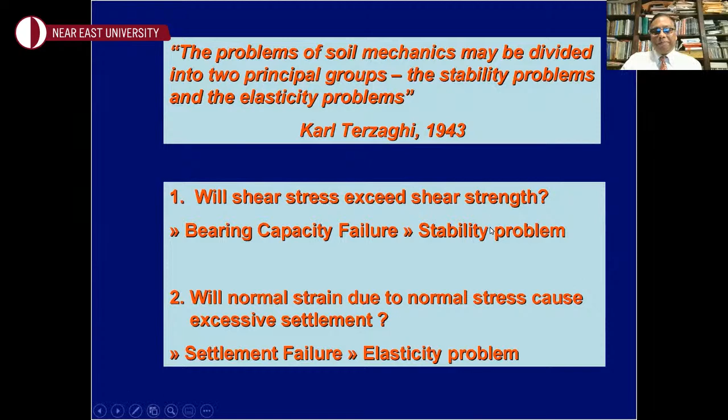Our presentation outline, we divided into 4 parts. Part A is the strip foundation subject to centric loading. Part B is subjected to vertical eccentric loading, and part C is inclined loading, and part D is eccentrically inclined loading.

Let's talk about part A, ultimate bearing capacity of strip foundation for centric loading. Terzaghi proposed this failure surface.

As we know, in this approach we assume that the foundation is located at a depth of dF, and the soil above the level of dF is approximated by the surcharge.

Which is given by Q equals gamma times dF, gamma being the unit weight of the soil. Terzaghi's theory deals with the C-phi soil, so cohesion is C and the friction angle for the soil is phi. There are three zones: the elastic zone ABC, the radial shear zone, and the passive zone BFG. Terzaghi assumed that the angle alpha is approximately equal to the friction angle phi.

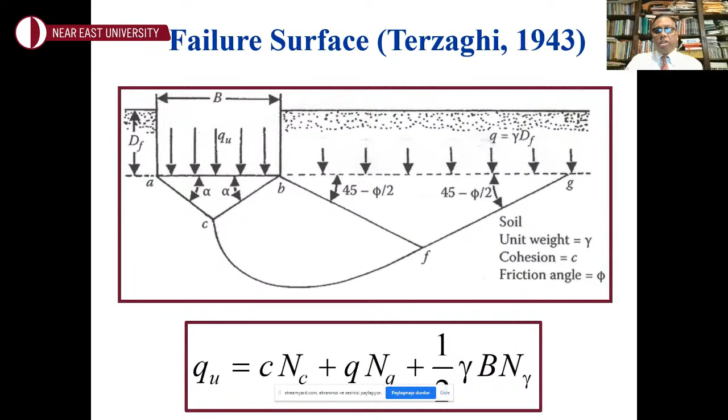P0 is the normal stress on the equivalent free surface, and M is the degree of mobilization, and C plus P0 tangent phi multiplied by M. M varies from 0 to 1.

The angle BAC and ABC in the triangular elastic zone is 45 plus phi over 2, in contrast to phi as assumed by Terzaghi.

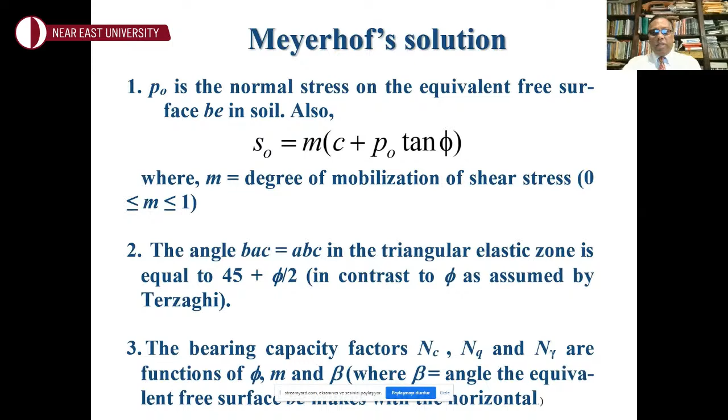Under those conditions, the soil above the level of the foundation is again approximated by gamma times dF, which is equal to the normal stress P0. For granular soils, the C term cancels out.

So this is the ultimate bearing capacity, and the bearing capacity factors NQ and N-gamma are functions of phi.

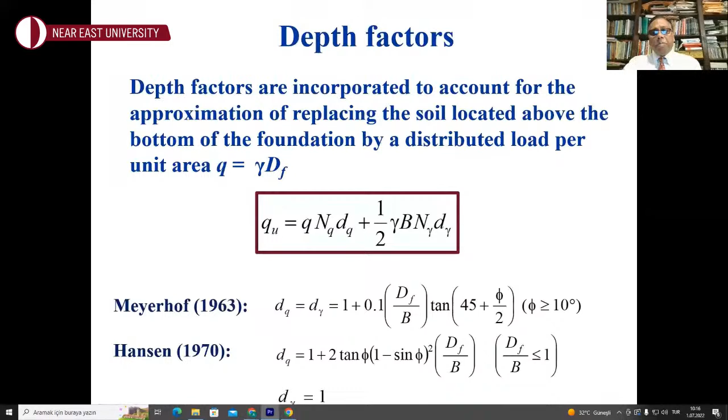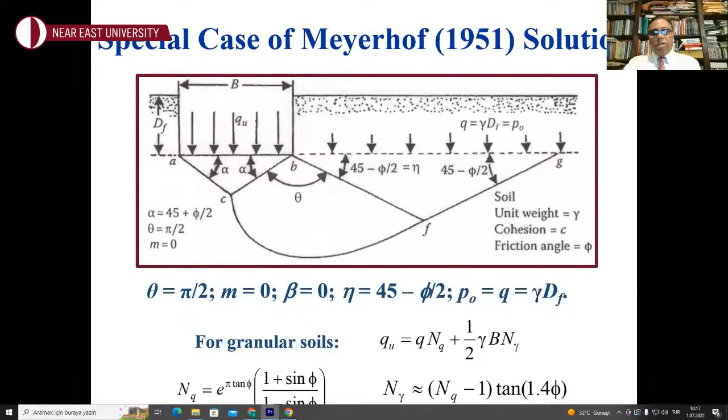So that's pretty much about part A, where the strip foundation is under centric loading in granular soils. Those are the two most well-known theories and theoretical developments, and we saw some modifications over the years since the 1960s, basically proposing new relationships for the N-gamma factor.

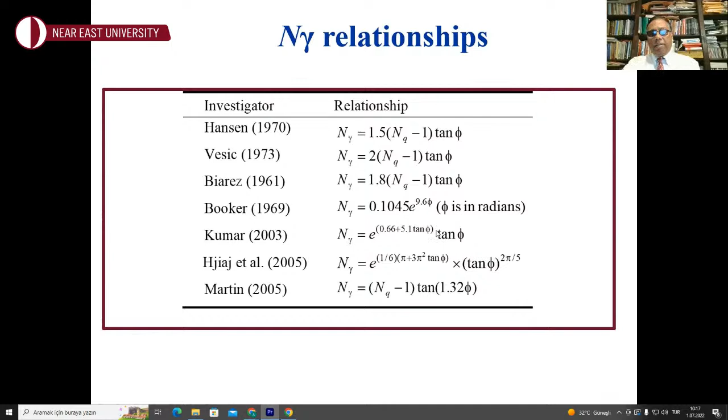That's pretty much it for part A. Let's move on to part B: foundation on granular soil subject to vertical but eccentric loading.

An extremely well-known solution was given by Meyerhof in 1953, called the Meyerhof's effective area method. As you can see on the right-hand side, this is the total width B, and there's an effective width B prime, which is given by B minus 2 times E, where E is the eccentricity of the vertical loading in plan view. So B minus 2E is the effective width B prime.

So QU prime is the ultimate load per unit area. Notice that Meyerhof's equation, incorporating the depth factors, is now using B prime instead of B. And the load on that effective area is given by capital QU. Notice that the B term in the depth factor should be replaced by B prime. So this is how Meyerhof's effective area method estimates the load bearing capacity of the foundation when it is subjected to a vertical eccentric loading.

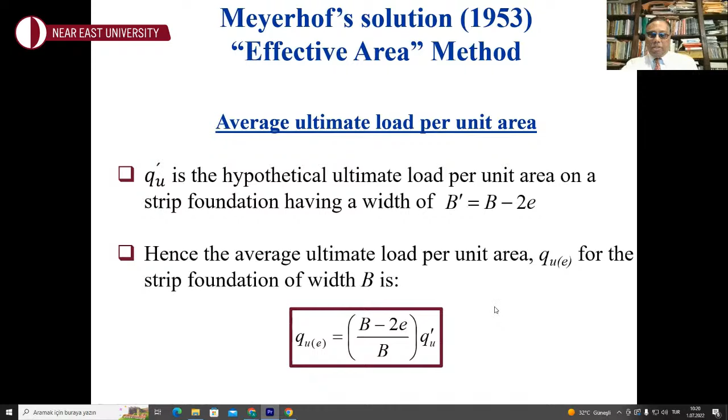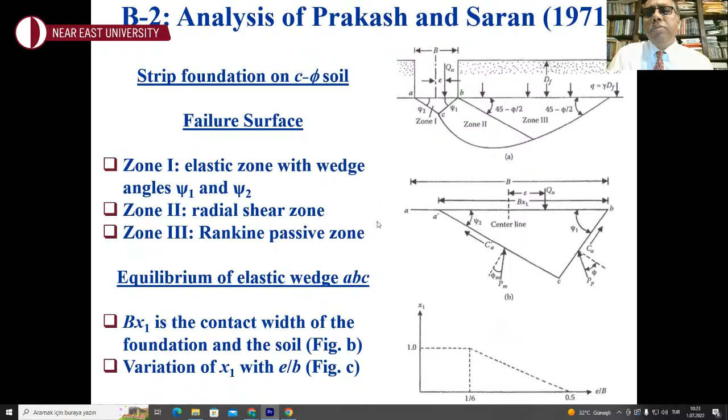So per unit length of that strip footing, it's given by this equation where PP and PM - here is PP and here is PM on that passive zone - both relate to the passive forces per unit length of the wedge, along the wedge faces BC and AC respectively. Phi is the soil friction angle, phi sub m is the mobilized soil friction angle, which is less than or equal to phi. CA and C prime A are the adhesion forces on faces BC and CA, given by these ratios, with angles psi 1 and psi 2. The mobilization factor is less than or equal to 1, and C is the unit cohesion.

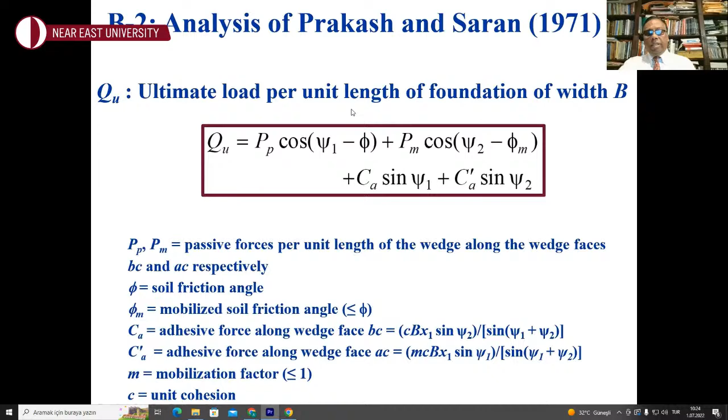So this is what Prakash and Saran in 1971 postulated on the ultimate load per unit length of the foundation of width B, again dealing with load eccentricity. Therefore, the average ultimate load per unit area - our classic definition of bearing capacity - will be equal to this, which can be expressed in a form similar to Terzaghi's original theory. We don't have the C term here because we're dealing with granular soils. Notice that the bearing capacity factors are now called N gamma E, where E is for eccentric loading - these are the bearing capacity factors for eccentrically loaded but vertical loading continuous foundations. So ultimately the equation looks like this.

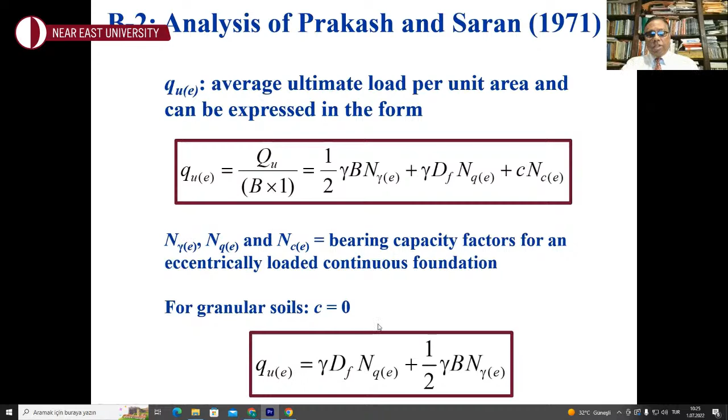And the bearing capacity factors NQE and N gamma E are a function of E over B and the soil friction angle. So that is what was proposed by Prakash and Saran almost 20 years after Meyerhof's effective area theory.

Then there was another theory postulated by Purakyastha and Char in 1977. It's generally called the reduction factor method. Many other investigators have looked into the reduction factor method, and they performed a stability analysis of strip foundation on sand using the famous Janbu method of slices for slope stability analysis. They proposed the reduction factor as follows: the reduction factor is 1 minus QuE over Qu.

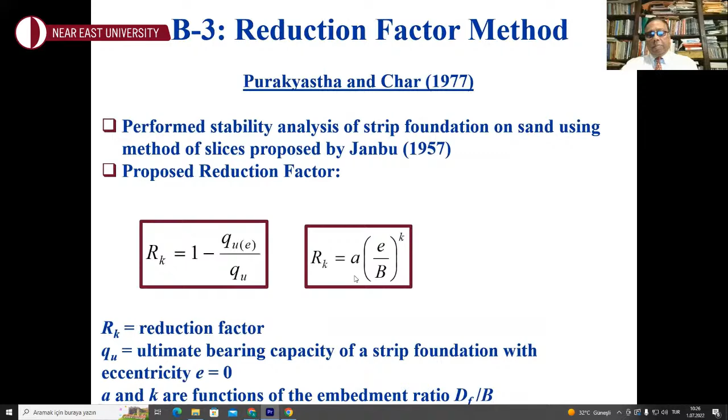Remember, Qu is the ultimate bearing capacity for the control case where there is no eccentricity. They defined RK, the reduction factor, in this fashion, and of course it depends on the eccentricity. The parameters A and K depend on the embedment ratio, and they provided the variation of A and K with respect to DF over B, the embedment ratio.

So from the previous equations, we are aiming to estimate QuE in terms of the reduction factor. It takes this form. And for any eccentricity, if you know the DF over B, then you can estimate the ultimate bearing capacity for the eccentrically loaded foundation.

Since C equals 0 for granular soil, the Qu equation, incorporating gamma, DF, and the depth factors, looks like this.

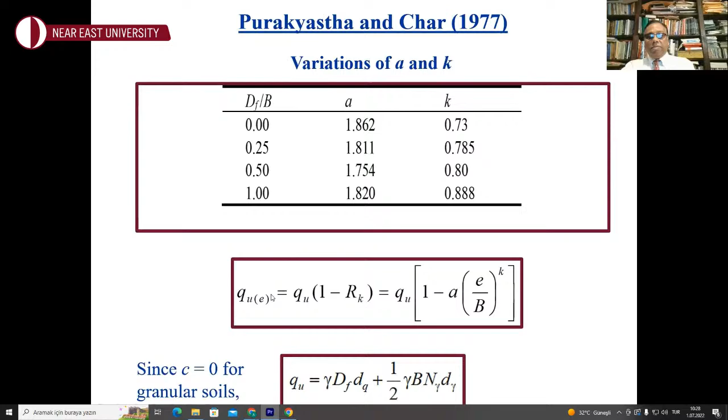There was a comparison made between this reduction factor proposed by Purakyastha and Char in 1977 and their reduction factor, because the reduction factor is a convenient way for estimating the bearing capacity of an eccentrically loaded foundation once RK can be ascertained, right?

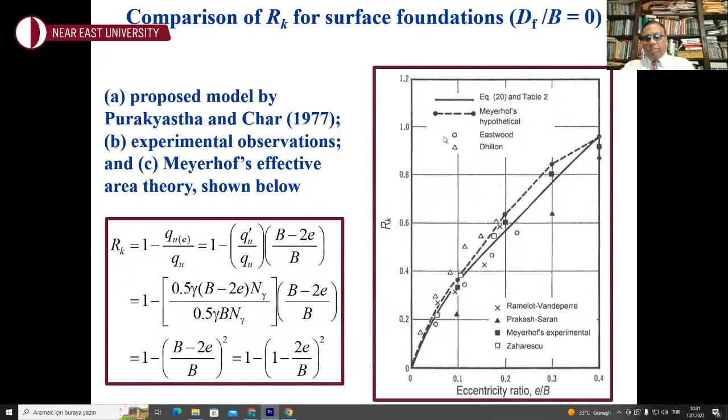Our co-authors, Patra, Behera, and Professor Das, in 2012, published results from quite an extensive series of laboratory investigations for both medium dense and dense sand, with dF over B varying between 0 to 1 and E over B eccentricity ratio varying from 0 to 0.15. So these results, we will discuss later as well.

But based on their experimental observations, they found that the QuE, which is the goal for this part, the ultimate bearing capacity for eccentrically loaded foundation, is equal to Qu times a factor, approximately, which incorporates the eccentricity ratio. So it looks like a nice approximation to estimate the bearing capacity of an eccentrically loaded foundation.

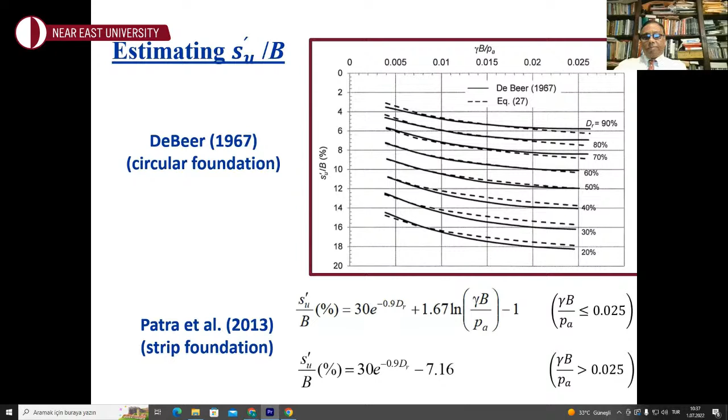So we are in part C. We finished centric loading and eccentrically loaded foundations, but that loading was vertical. For now, we are not looking at eccentricity, but at inclined loading, and looking at the development and extension of Terzaghi's theory and Meyerhof's theory to incorporate inclined loading.

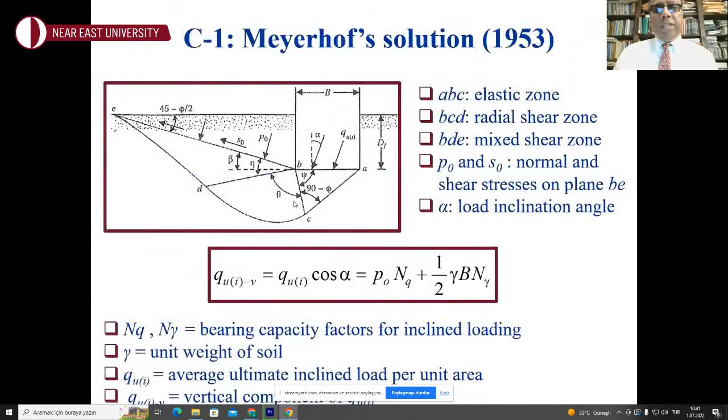The bearing capacity factors will be different because it's inclined loading. Meyerhof represented NQ and N gamma in this way, where PP gamma minimum is the minimum passive force per unit length of the foundation acting on face BC at an angle phi. It's not shown in this diagram, but the plane BC is right here, so the PP gamma minimum acts right here.

And of course, you need to know all these angles. This can be expressed in the usual manner, following Terzaghi's landmark theory along the same format, along the same line. In 1963, Meyerhof expressed his bearing capacity for inclined loading, the vertical component of the ultimate bearing capacity.

Given in this format, NQ and N gamma are the bearing capacity factors, DQ and D gamma are the depth factors, and he defined the inclination factors in this manner. So these are the Meyerhof inclination factors. We come back to the familiar form, with modifications made to the original theory. In this case, along with the depth factor which Meyerhof postulated, he incorporated the inclination factors.

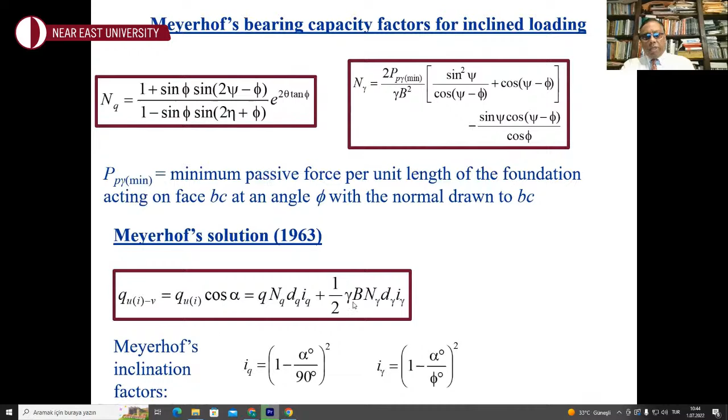So here is one solution, and here is the other classical solution, with the incorporation of the inclination factors.

Some purely theoretical development: Dubrova, worth mentioning, in 1973, with centric inclined load, postulated this equation for the vertical component of the ultimate bearing capacity with inclined centric loading, expressed in this way. Alpha is the load inclination angle, and the bearing capacity factors NQ star and N gamma star vary with the soil friction angle. So this is from purely theoretical considerations.

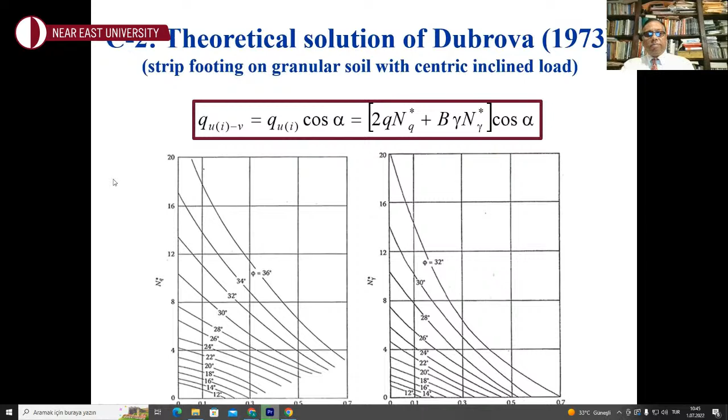And of course there are some empirical observations. This review is not meant to be comprehensive, but it points out the significant, noteworthy developments. There may be others, but these two are noteworthy: one is by Muhs and Weiss, 1973.

Q is the ultimate bearing capacity with centric vertical loading, and QUIV is the vertical component of the inclined centric loading. This ratio is only dependent on the load inclination angle, assuming QU is estimated, and these two must be at similar DF, at similar values of DF over B. So quite a simple formula developed through empirical correlations.

I always tell my students that anything that ever changed the world was actually pretty simple. If you have a very long equation, chances are it will not be adopted by the practicing community. This is purely my personal opinion, okay?

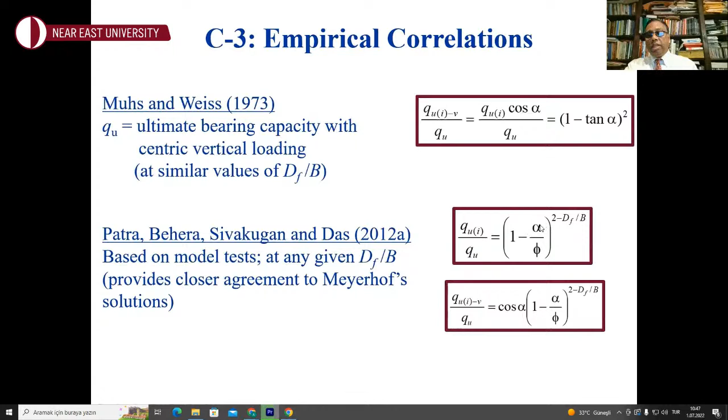Now we are at part D, the strip foundation subjected to eccentrically inclined loading. There are a few more references - in our paper, hopefully some audience members would be interested in this topic and read that paper. It includes a few more references discussed briefly, but the ones in this presentation are those I thought worth mentioning within this limited time. So part D: strip foundation subjected to eccentrically inclined loading - not only inclined, but also eccentric loading.

There are two cases that can happen: one is called the partially compensated case, another is called the reinforced case. In the partially compensated case, the line of application is inclined toward the center line of the foundation, as shown here. As opposed to the reinforced case, where the line of application is inclined away from the center line of the foundation. This is the center line of the foundation, and this is the eccentricity E.

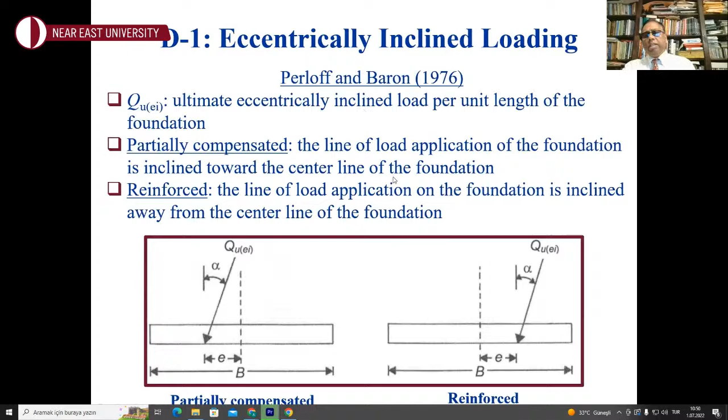Again, for the Meyerhof 1963 effective area method, incorporating both the inclination factor and the depth factor, this is the Meyerhof effective area method to deal with the inclination and the eccentricity.

Q prime U EI dash V. Q prime U is the ultimate bearing capacity effective area method. We can see B prime here, B prime being B minus 2E, and then you have the vertical component of that. Based on the previous development, it is expressed this way. The D gamma, I gamma, IQ, DQ are all based on the original Meyerhof developments that we already discussed and the equations we already discussed. So this is the effective area method by Meyerhof.

So we have looked at Meyerhof's theory for centric loading, and then for eccentric loading, and then inclined loading, and now eccentrically inclined loading.

Saran and Agarwal in 1991 did a pure theoretical analysis, and they postulated this, where NQEI and N gamma EI are the bearing capacity factors. If alpha is equal to 0, then NQEI will just become NQE, because if there is no inclination when alpha equals 0, they coincide with previously discussed Prakash and Saran 1971 theoretical analysis.

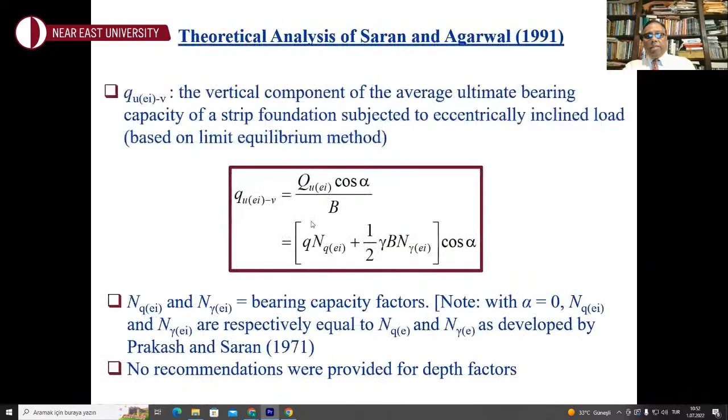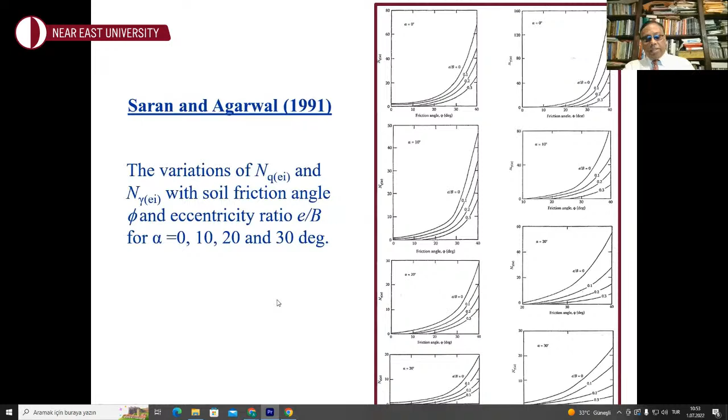They provided guidance to determine NQEI and N gamma EI, with soil friction angle phi and eccentricity ratio E over B, and then the soil friction angle and the load inclination from 0 to 30 degrees. So there is guidance for NQEI and N gamma EI. I apologize that the writings are very small, it's a lot of graphs. I didn't want to truncate this, I could have, just to show you what it is, but just wanted to show you that in a comprehensive way, load inclination factor goes from 0 to 30 degrees. And there's eccentricity ratio and a wide range of friction angles, so a pretty comprehensive development for the eccentrically inclined loading.

How does this compare with the previous development? We don't know, they were not reported in the literature. These are my understanding, these are independent analyses.

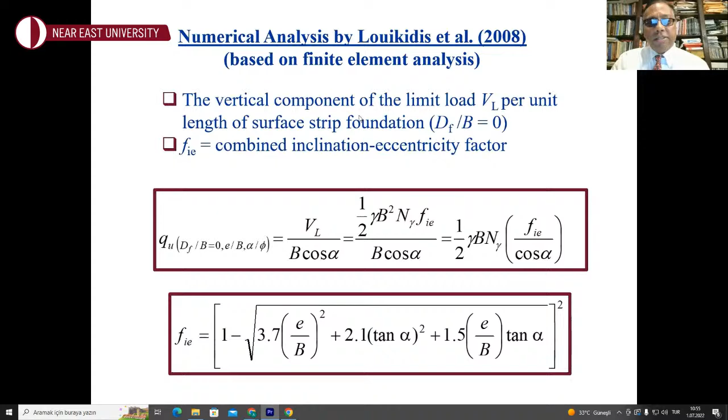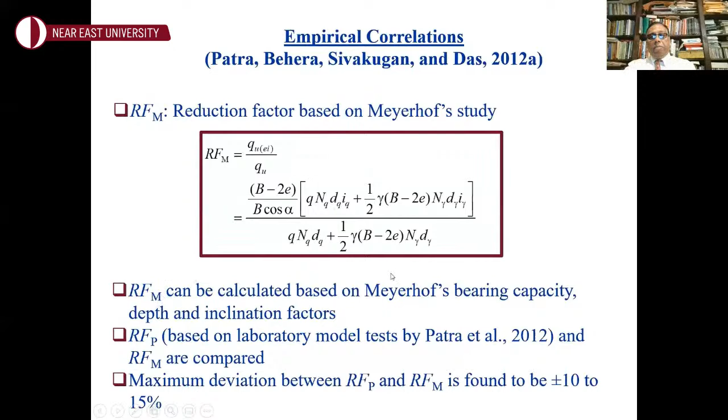Again, this is based on Meyerhof's effective area method. Based on that, you can calculate RFM and then compare with the experimental reduction factor by Patra et al. This is a pretty nice validation of the reduction factor method, which, if you recall, was originally discussed in the Purkayastha and Char 1977 paper.

There's very little information available, as I mentioned, most of the cases in the literature are on the partially compensated case. Here we are talking about the reinforced case, and very little information is available. This is the numerical analysis by Loukidis.

I apologize, my daughter was talking in the background. This is what we learned working from home. This is my home library, as you can see, all these books behind me, and I can assure you I haven't read all of those books. So I just wait for them to leave me alone for a few minutes.

Coming back to the reinforced case: it's a numerical analysis by Loukidis et al. in 2008, based on finite element analysis. We talked about it before, but right now it's for the reinforced case, for eccentrically inclined loading, so that combined inclination eccentricity factor, FIE, is slightly modified here.

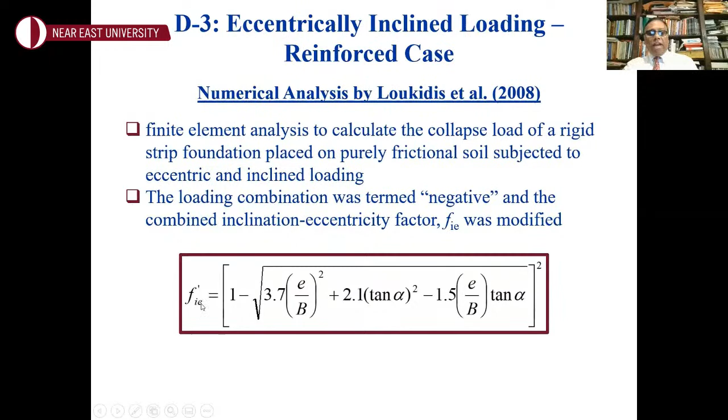They called it a negative case. In the previous equation, this sign was positive; here it's negative. You follow the same approach that was presented before, except for this FIE, now it's called prime.

Empirical correlations, again, we are looking at the reinforced case. Almost no information is available on experimental determination of the reinforced case based on 72, except for Patra et al. 2012a.

They also developed the relationship for settlement ratio. You can see that the reinforced case divided by the partially compensated case, for alpha from 5 degrees to 20 degrees, varies from 1 to 1.4.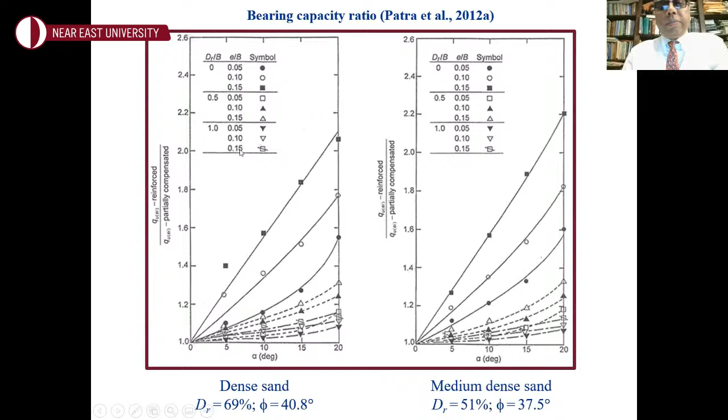dF over B varied from 0 to 1, and these are the eccentricity ratios, with similar diagrams for the settlement ratios. Very interesting experimental observations from the elaborate setup that our co-authors constructed at the National Institute of Technology in India. The academic community is very grateful for their extensive series of laboratory tests, painstakingly done, and we could make use of that data for future predictions and calibration of our models.

It's a similar trend, and this ratio gives a nice guideline for the reinforced case versus the partially compensated case, so you have a nice idea about how the settlement would vary.

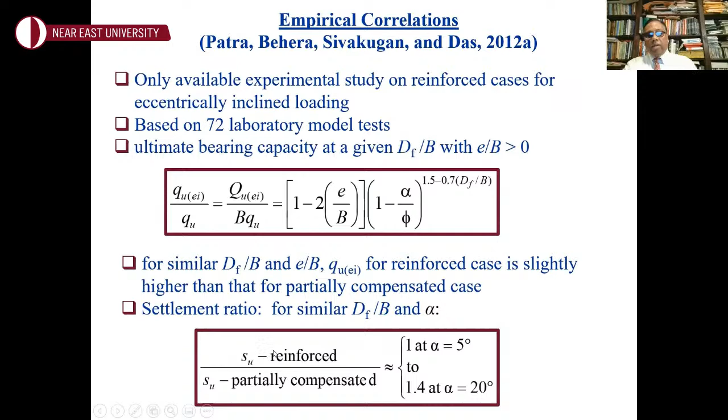Finally, our co-author Behera, very recently in 2018, presented probably the only case where we say it's a combined case. Combined case means it's not eccentricity and inclination, but about the partially compensated case and the reinforced case.

They took all the laboratory test results done by Patra et al. 2012A, almost like 200 laboratory model tests, and developed this reduction factor. On top is QU, and it has DF over B, E over B, alpha over Phi, and LA, which is a new term. LA is called a load arrangement factor, divided by a control case at similar DF over B, with no eccentricity, no load inclination, and the load arrangement factor of 0.

So we know this, at least we want to claim that we know this from various means. And this is the right-hand side. So the new item LA is called the load arrangement factor, and this is how they combine the partially compensated case and the reinforced case. Pretty novel work.

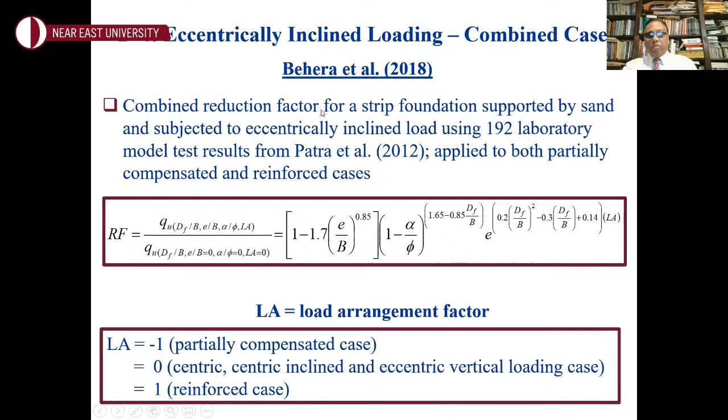LA will be -1 if it's partially compensated, 0 for centric inclined and eccentric vertical loading, and 1 for the reinforced case. So it goes from -1 to +1. Pretty novel and pretty comprehensive approach, recently published in 2018.

So here are some conclusions. I was not keeping track of the time. I'm recording this at my home, so nobody was alerting me about the time, but I'll be brief now. We have done a review of developments in the area of ultimate bearing capacity of shallow strip foundations on granular soil due to vertical eccentric loading, centric inclined loading, and eccentrically inclined loading.

Based on the review, it appears that Meyerhof's bearing capacity theory, incorporating the depth and inclination factors, is probably still the best approach, and any new developments are actually compared with Meyerhof's approach.

For foundations subjected to vertical eccentric load, the method proposed by Patra et al. provided a reasonably good estimate of the ultimate bearing capacity, and it was compared with other methods.

There was a novel procedure presented by Patra for the average settlement of a foundation under an allowable eccentric vertical load. We want to make a statement that the estimated settlement should be considered as a first approximation only, but the approach was, in our opinion, pretty novel.

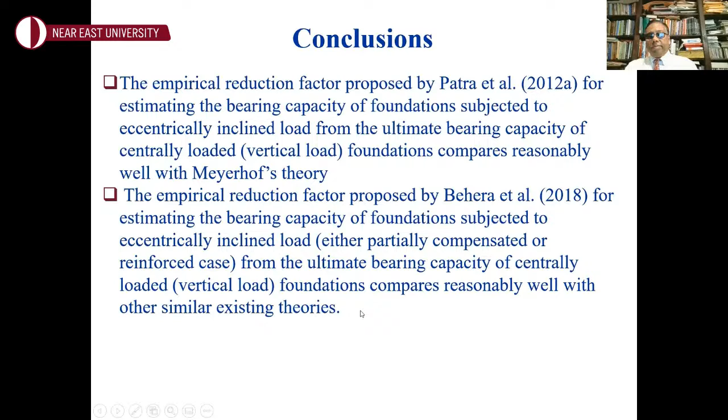So that concludes my presentation. Hope you enjoyed it.

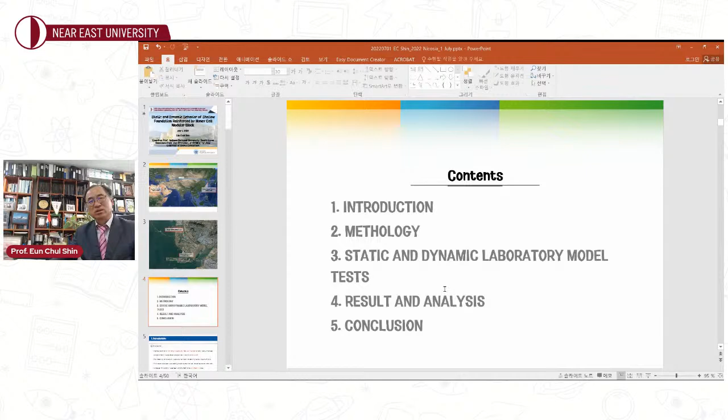So the content of my presentation today: introduction, methodology, and the static and dynamic laboratory model tests. Particularly the dynamic test is more like the shaking table test. And then the results and analysis, followed by the conclusions.

So the reliability of Honeycell capacity has been studied through laboratory tests, static and dynamic shaking table tests, and also plate load tests at the site.

The method has been successfully implemented for real structure construction sites. We had more than 400 project sites in South Korea. Why is this methodology so popular? Because of its cost effectiveness and very simple construction method, which gave it a tremendous expanded market share in Korea.

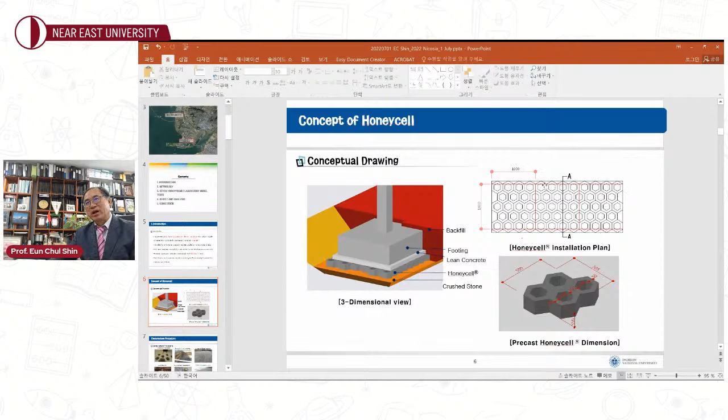At the bottom, we grade the virgin ground, then layer about 30 centimeters thickness of crushed stone. Then we set up the Honeycell modular block, a hollow block, and fill it with crushed stone. Then we put in lean concrete and also the normal shallow foundation system on top. This is an example of a schematic diagram of the layout and plan view.

This is the sequence of the construction work. This is the view of the Honeycells. We can construct it without excavation or scraping the ground surface, or we can have excavation if we want a basement, so a 1-story or 2-story basement.

After grading, we place the crushed stone with a thickness of about 30 centimeters, then compact it with a smooth wheel roller. After that, using crane equipment, we transport the blocks one by one. They're heavy enough that people can't transport them, so equipment is needed.

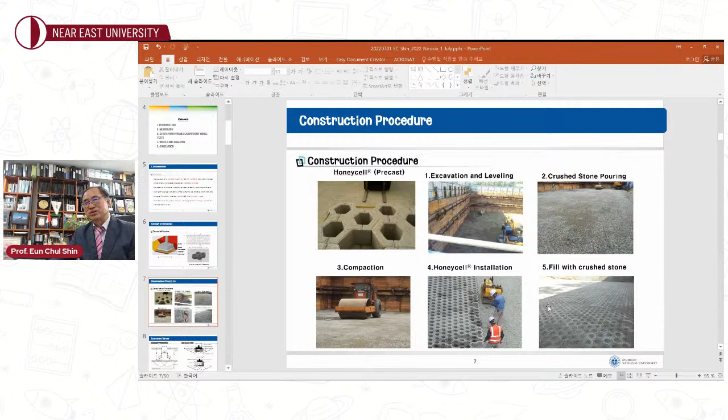After that, we fill the crushed stone inside the block and a little above it, and using a small compactor, we level and lightly compact the ground surface. This is the finished foundation system, like this.

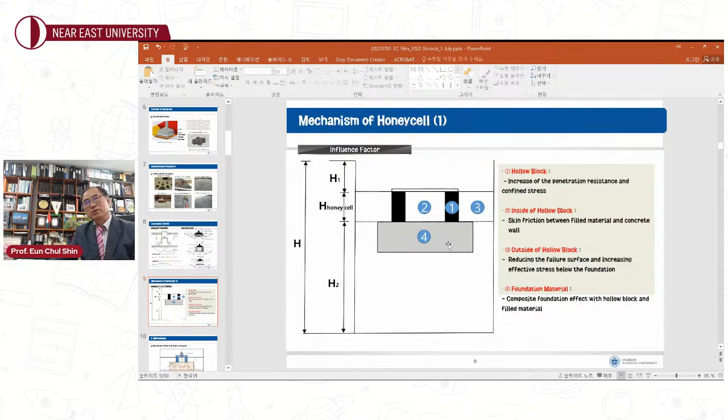This failure model looks very much like the Meyerhof-Hanna model, but here we have the hollow block space and resistance along here - this is a schematic diagram. We also have the bearing capacity problem in the bottom soft layer. So we combined this part, this part, this part, and the basal part - four parts together - to propose the formula for estimating the bearing capacity.

So this is the formula: Q total. Q sub S is the skin friction inside the hollow block, and Q sub K is this part, the bearing capacity of this part here. And the next formula, Q sub KS, is this block.

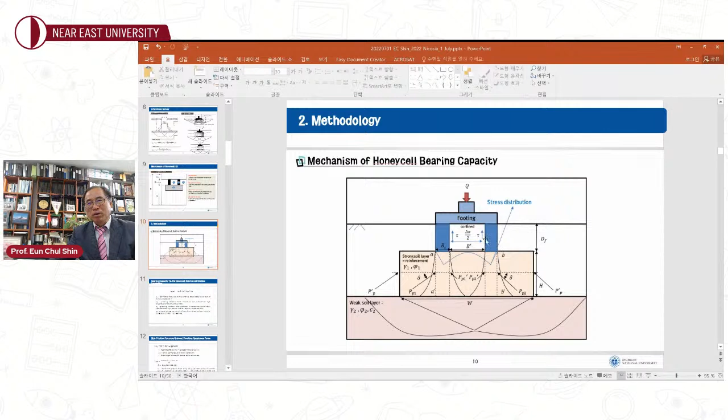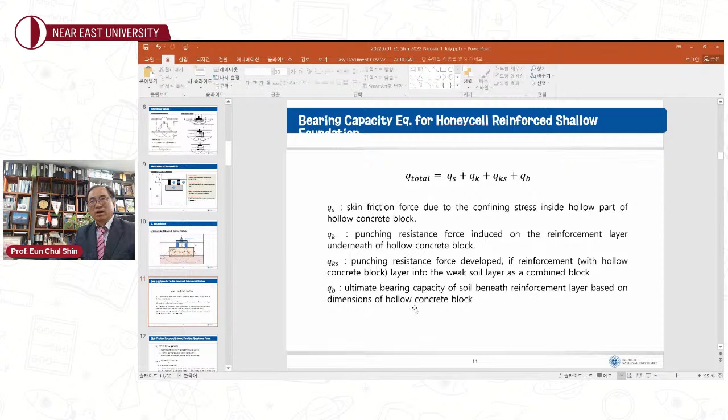This is a block mobilized together against the surcharge load, and the number Q sub B is the ultimate bearing capacity of soil beneath the reinforced layer, based on the dimension of the hollow concrete block.

So we defined each category of this. Of course, we can find this through the direct shear test, and we can find the interface friction angle from the direct shear test, and calculate overburden pressure, and Q sub S, which is right below the hollow block, is a parameter.

We can find Q sub K, like punching resistance, as Meyerhof proposed. Q sub KS is the bottom reinforcement resistance together with the hollow block area acting as one body, like a puncture resistance force in the combined concrete modular block and reinforcement area.

Number 4 is the basal reinforcement, which is the area of reinforcement divided by the area of the concrete block. This is similar to Meyerhof 1963, a general equation for calculating the shallow bearing capacity of a shallow foundation, with consideration of the shape factor, depth factor, and loading inclination factor.

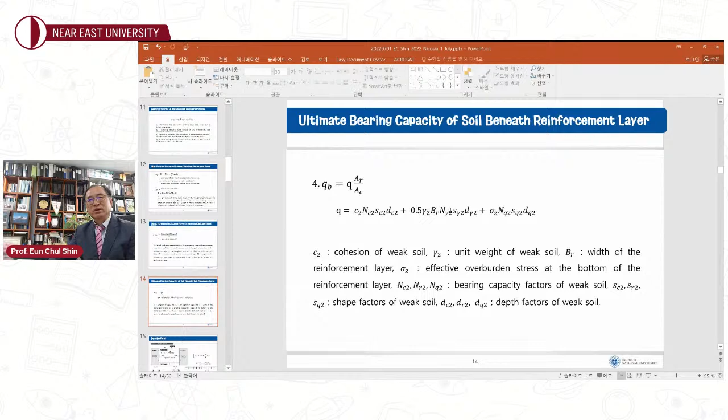So with the combination of four different categories, we can add them together to determine the ultimate bearing capacity using the modular block, hollow block foundation system.

This is inside the increase of shearing strength inside the block. As you see, the C terms and the apparent cohesion - we can calculate sigma h and tangent delta to find the shearing resistance.

Because of this advantage, we have a very large interface area with the gravel, internal friction, and additional confined pressure, so the resistance increases very much against that.

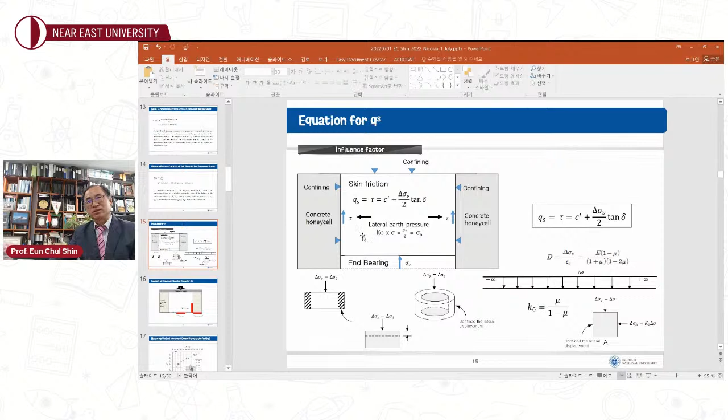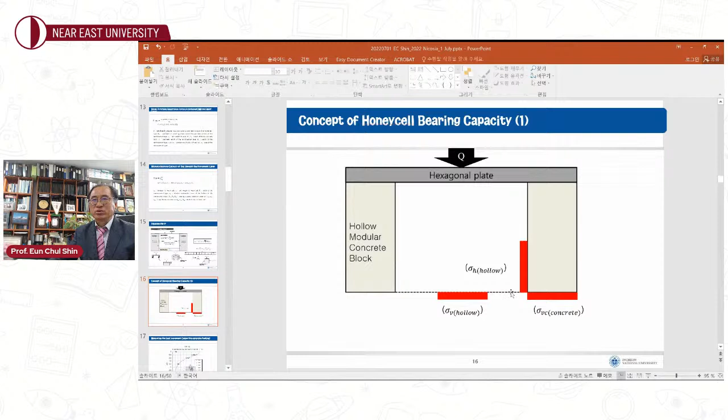We monitor the load distribution - when you apply the load, how much is distributed laterally here, and vertically here, right below the concrete block. We measured this by installing load cells and quantified it.

Now we want to measure the vertical stress increment due to the surcharge load on top, so we install load cells at different locations and measure the load increment with respect to depth. We also install load cells below the hollow block at different locations to estimate the load increment.

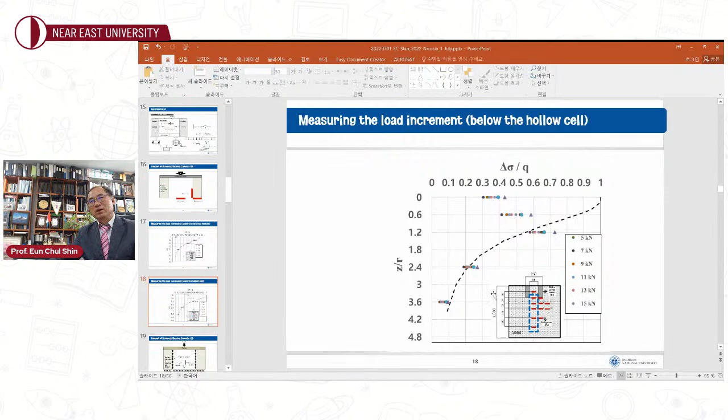We can also calculate the load increment using the Boussinesq equation. As you see here, this is a conceptual Honeycell bearing capacity problem - upon loading, due to vertical load or load transferred to lateral load, we create shearing resistance all along the interface between the aggregate and the concrete block.

In the hollow part, we have higher resistance because we have a bottom with an aggregate reinforcing part providing puncture resistance, and also a high intensive vertical load here, so the resistance is much greater in this part than others. We measured this as well.

We move to the static bearing capacity test. We have a very simple device with a circular container manufactured from steel, a data logger, and we apply the plate load. In this case we use a single modular block, with a loading plate on top, making a hexagonal shape.

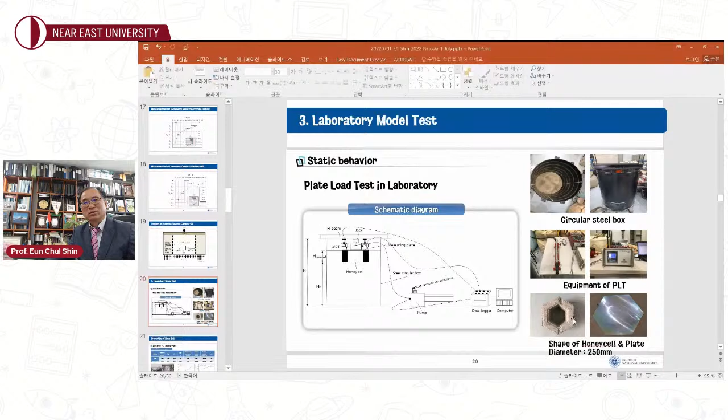We determine the fundamental soil properties for the sand fill material and base material, the crushed stone, using a large direct shear device, 30 centimeters by 30 centimeters. We found the apparent cohesion and angle of internal friction, and the aggregate gives a higher apparent cohesion value.

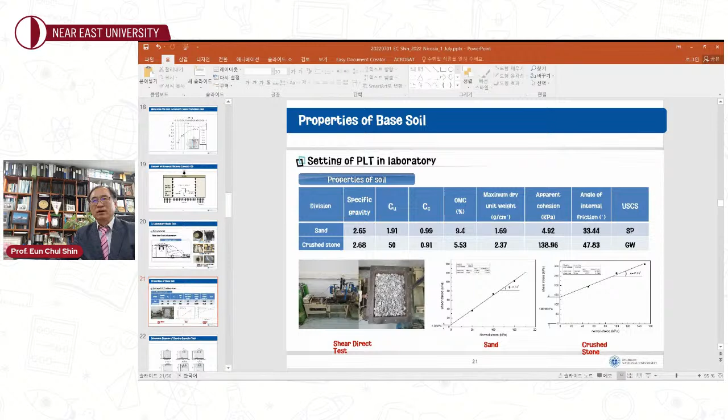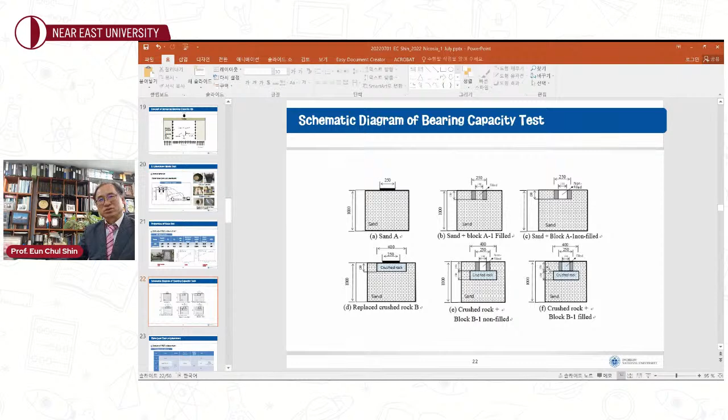We have 6 different cases. For the first series of tests we used sand as the factory soil, and for the second case we used crushed stone, which is really used in the field. We want to compare filling the hollow block inside - empty or with crushed stone - to find the difference in bearing capacity.

So sometimes we have some coastal line issues, some liquefaction problem, and also loosening of the ground due to earthquake strikes. We used about 0.14 g, which I think is normal for South Korea, but the extreme case, El Centro, is 0.22 g. They use that for nuclear power plant construction and so on.

So we used two different G levels, and we applied three different types of waves. One is a short period wave. Another is a long period earthquake wave, Hachinohe, and another is a mixed, artificial one. We also created the artificial wave and applied it.

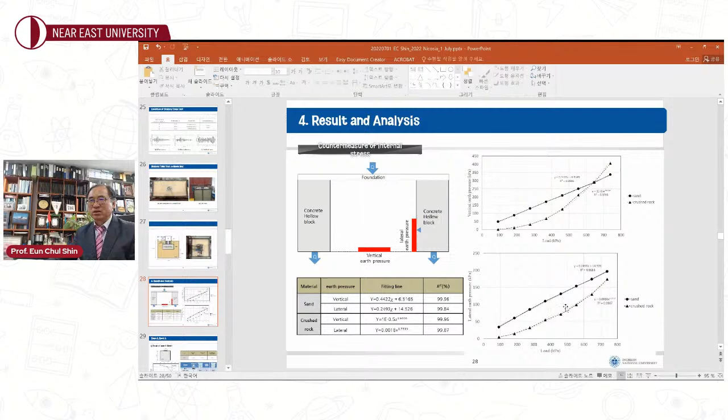This is crushed stone, yeah. For this, this is a lateral load. This is a vertical earth pressure, right? And this is a lateral earth pressure. Lateral earth pressure for the sand case gives a higher value, I think because of the interlocking of the crushed stone layer.

As I said, for case one, with no reinforcement, we put in the plate load test and determined the bearing capacity for this. And for the second case, we filled the sand in the hollow part, and we found out a pretty high bearing capacity, 924 compared with the first case. About 3 times, 3 times greater than the unreinforced ground, so a very much increased bearing capacity.

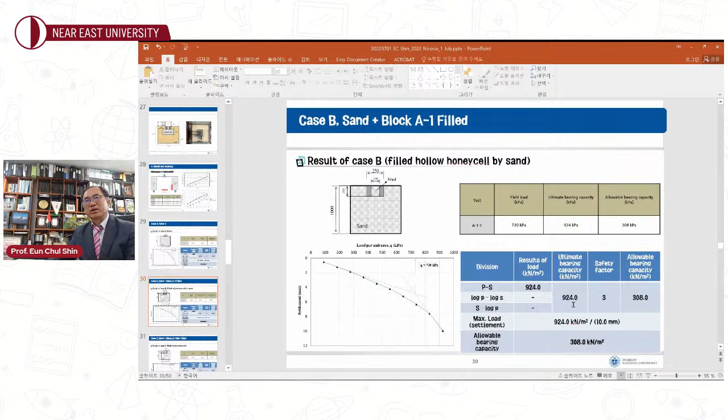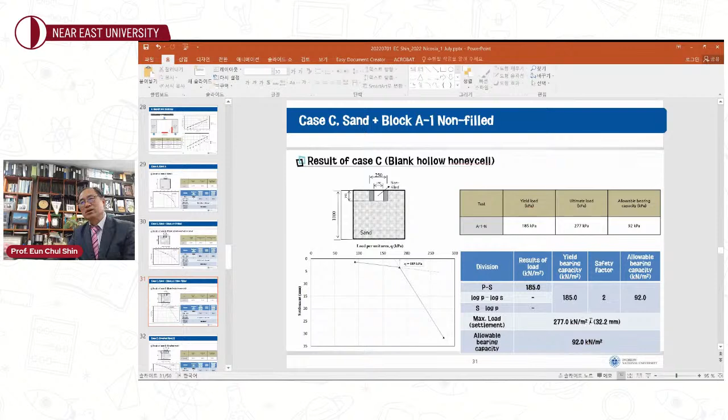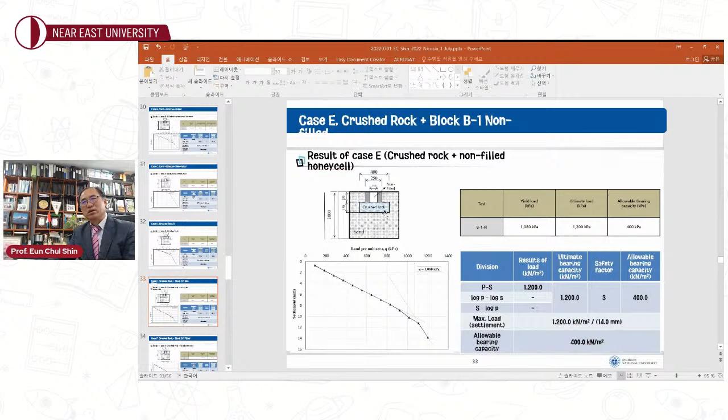And also without this, I think the bearing capacity is about 250 or something, so not much increase in bearing capacity for that case. But crushed stone gives a much higher bearing capacity. This case has no hollow block, just an empty block. I think it's 1,200. That's a great increment because of the basal reinforcement, and with filling the crushed stone, we found the greatest bearing capacity.

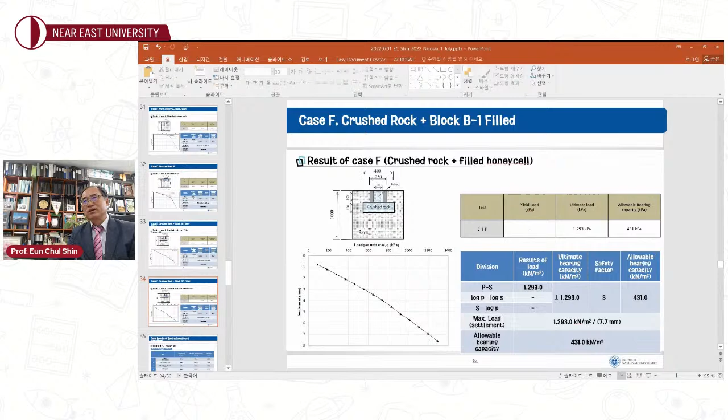We tabulated all those results, and not only did filling the hollow block with sand or crushed stone increase the bearing capacity very much, but also the settlement was reduced very much. As I said, due to the interlocking on the hollow block side, it increased the side friction and shearing resistance, which takes the overburden pressure. So that load is not transmitted below the ground, which is why we decreased settlement very much. This is a great advantage of this reinforcement. And then we plotted it all together.

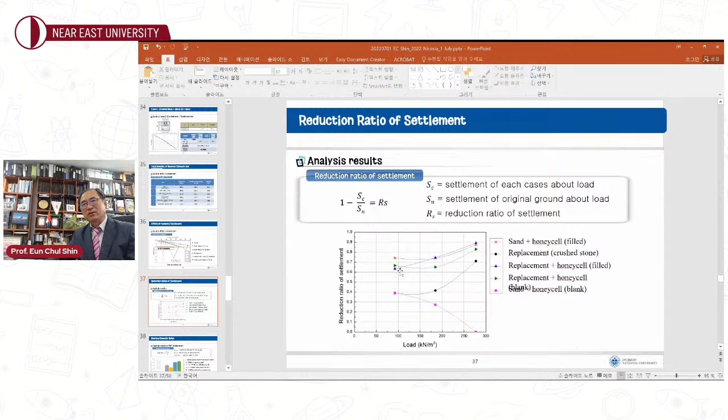So the bearing capacity ratio we determined, based on the non-reinforced case, the crushed stone part is about 4.31 times greater than the unreinforced one. This is for the non-filled honeycell, and the sand case also shows a very great bearing capacity.

Of course, we can calculate all the bearing capacity using our proposed equation. We compared it with the second author of these papers, Dr. Lee, in his PhD dissertation, and found it very similar to the theoretical calculation of bearing capacity with the model test.

This is a measurement of the load distribution, showing a hollow block with vertical confined force inside. This is right below the hollow block, about 16 to 18%. The lateral confining force takes more than 20% of the load, and the concrete part of the modular block right below takes more than 50-60%.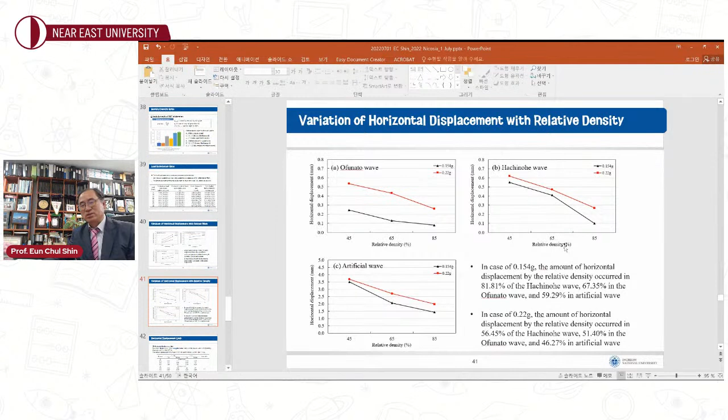We tabulated all horizontal displacement values, and this is a 4.5 millimeter limit because of 300 times 0.015. I think this is a much higher value compared with the Canadian and German codes. It's very strict for this case.

Normally for the steady case, it's h over 300 - this is the normal case for the temporary brace cut wall. But here, for the dynamic case, it's about 0.015h. So except for the artificial earthquake case, which gives a higher value...

I think the artificial seismic wave gives the very highest value, but the rest, Hachinohe and Ofunato, give a very small magnitude of lateral displacement.

Let's move to the field case study. Samsung produces computers and many electronic goods, so they are very sensitive to dynamic loading, horizontal movement, and bearing capacity.

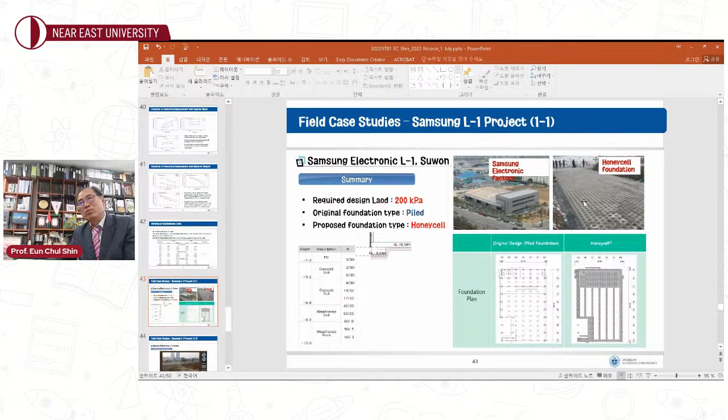But this layer here, it's not much surcharge load. So we have a strip foundation type of modular block reinforced ground, and we successfully implemented it. I can see here the N value, standard penetration N value. I think this is very soft clay here, okay? But still, we can take care of the load by utilizing the hollow modular concrete block.

This construction motion picture, maybe we can show. No, okay, I think we have simulated this, but this is a very simple construction procedure.

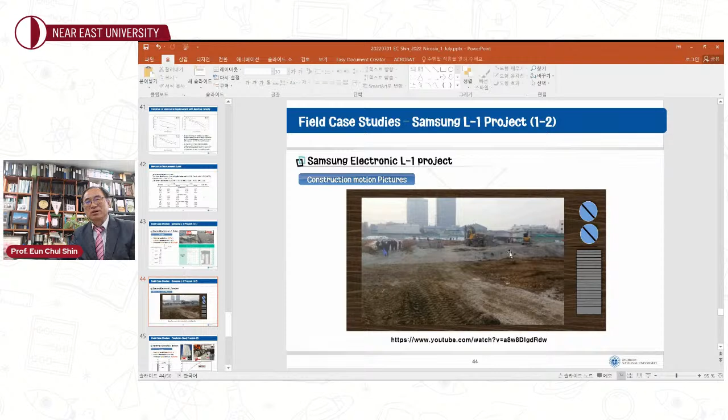As I said, I think this is near the Suwon area. We have a lot of soft ground. As you see, we took a photograph, a photograph of the side, 1, 2, 3, 4, 5-story buildings. We have a very congested area. Both sides we have 5-story buildings and soft clay foundation here, like here.

Okay, N value is about 5 or something, 4. So when you're putting in the pile foundation here, you have a lot of vibration of the ground. That creates consolidation of the clay adjacent to the building foundation, which dissipates the pore pressure that influences the building foundation, so the building may try to incline.

So in order to reduce the vibration and also disturbance and noise from pile driving, we adopted the Honeycell foundation system. As you see, after installation of the Honeycell, we did a loading test, plate load test, and we found out about 21 tons per meter square. That's greater than 15 tons, because for 5 stories, that's high enough bearing capacity against the building surcharge load.

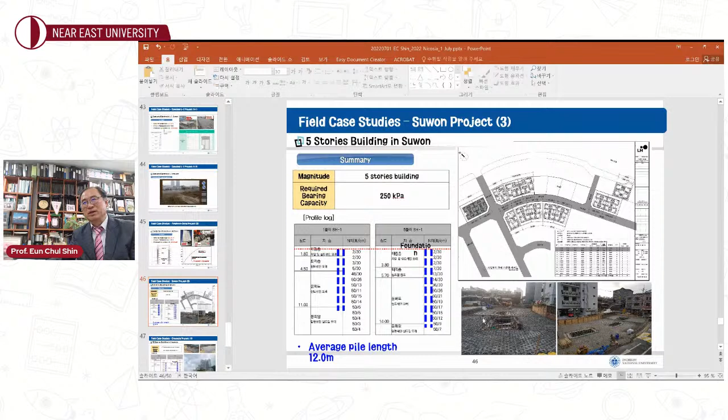And this is another case history, about the Suwon area near Seoul, about a 5-story building right here. Okay, 5-story building here and here, required 250 kPa. And we found out the N value here is pretty soft, 2 to 7 or something. But still we adopted this concrete modular block. We were supposed to put in pile length of 12 meters, but instead we used the Honeycell foundation system, and we took care of the problem.

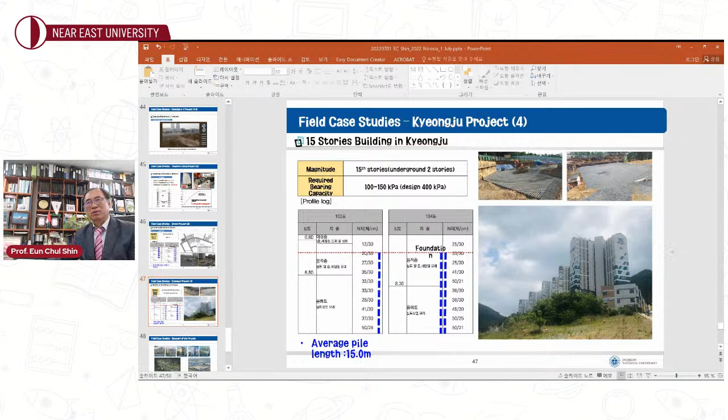And sometimes we have 15-story buildings with 2 underground floors, of an apartment complex right here under construction, and that's pretty steep for the soil foundation here. I think it's good enough here, so we built this kind of structure completed without any problem.

And there's various cases, I think this is a good foundation system, particularly for 5-story or 6-story buildings in soft clay. But if we have a little bit stiffer soil, N value 20 or 30 SPT value, then we can have more than 10 stories, 15 stories of buildings. We have Jeju Island and many different buildings across Korea. They already implemented more than 400 sites in Korea. I think the maximum highest building is 23 stories, maximum load 600 kPa.

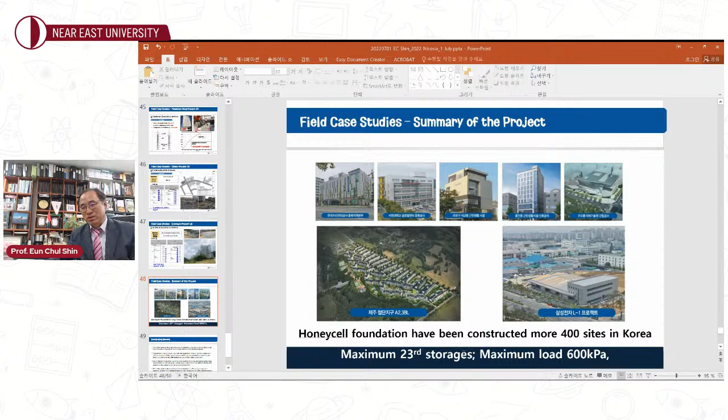In conclusion, hollow modular block reinforced shallow foundation in soft clay is cost effective and very easy to construct in very limited areas, with environmentally friendly conditions, like less vibration, noise-free technique. Using the hollow modular block reinforced foundation gives more than 3 to 4 times greater bearing capacity than the unreinforced case.

And also we propose a general equation for estimation of the bearing capacity for reinforcement by the hollow modular block, and we compared it with the measured value, and we found it pretty accurate. And the vertical pressure with the reinforcing modular block foundation can reduce about 40% of the load increment, which increases the bearing capacity and reduces probable settlement.

So the hollow block, modular block reinforced shallow foundation is effective against dynamic horizontal loading. The horizontal displacement decreased with increasing relative density, and also the value stayed below the limit of 4.5 millimeters, the Korean design standard.